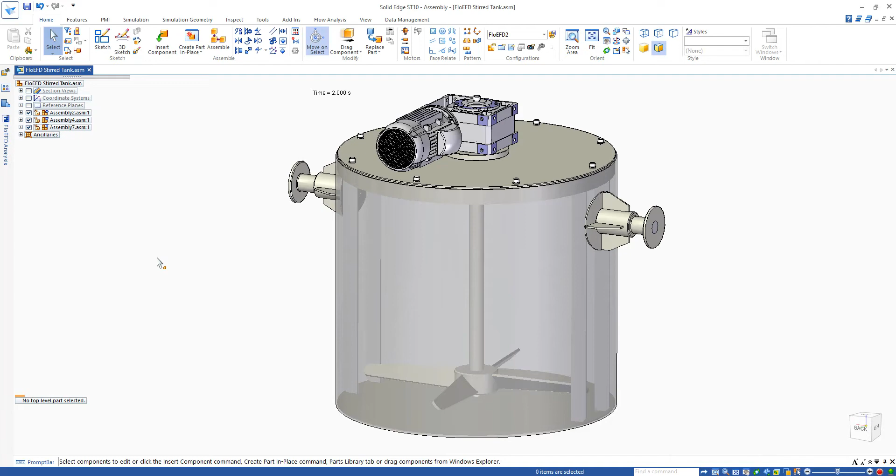So first of all, let's go over to our flow analysis tab and have a look at some of the general settings. We can see straight away this is going to be a time dependent or transient analysis, so we're going to be simulating over 2 seconds of transient. We've got gravitational effects turned on. We also have rotation with the sliding mesh turned on, so we're going to be using the moving mesh capability of FLOEFD. If we look at the fluids, we can see that we're mixing water and ammonia together.

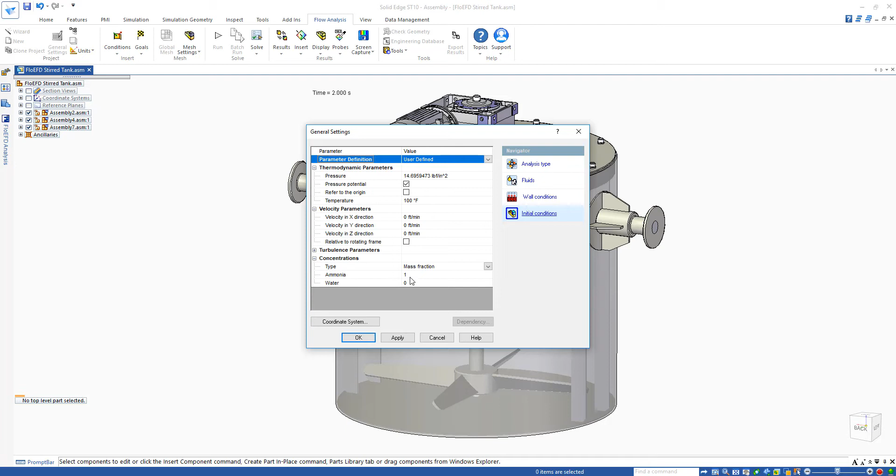And under the initial conditions, we can see that at time 0 it's going to be 100% ammonia in the tank as the starting fluid. Now if we come over to our FLOEFD analysis tree, we can have a look at some of the setup here. So first of all, you can see that we have a rotating region on the paddles. We're moving at 240 RPM.

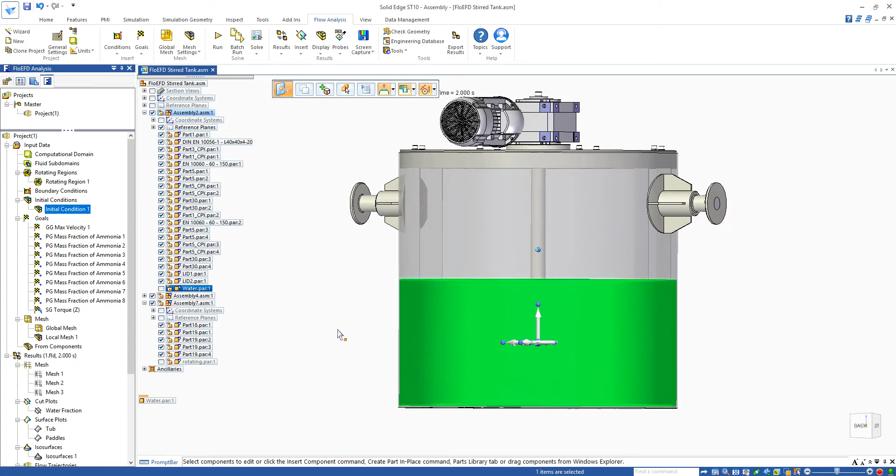The initial condition, you can see that there is a fluid level here, so the lower half of the tank is filled with water. If we look inside the properties here, we can see that we have water, 100% water at 100 degrees Fahrenheit, and we'd like to see what the mixture looks like at the end of that transient. So we can have a look at some of the results.

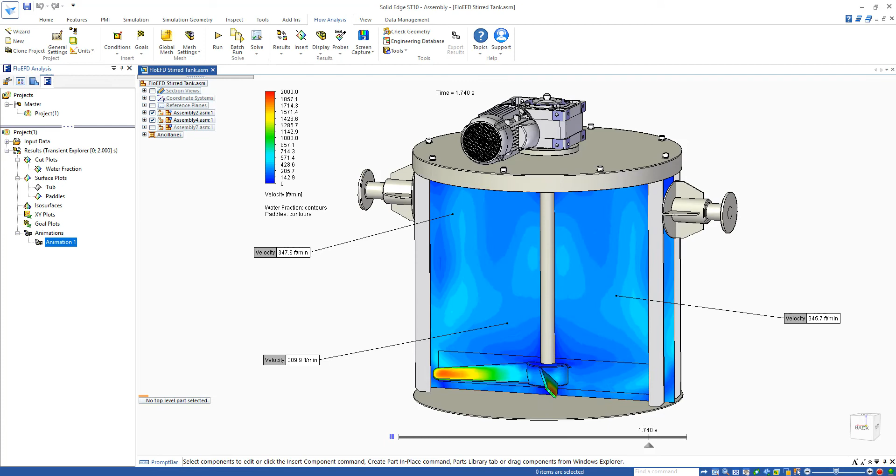This is the same plot, but this time colored by fluid velocity. We can see the high velocity region on the moving paddles. We can also see the flow develop as it moves up the inner sides of the tank and then back down the center. The maximum velocity of around 2,000 feet per minute can be seen around the paddles.

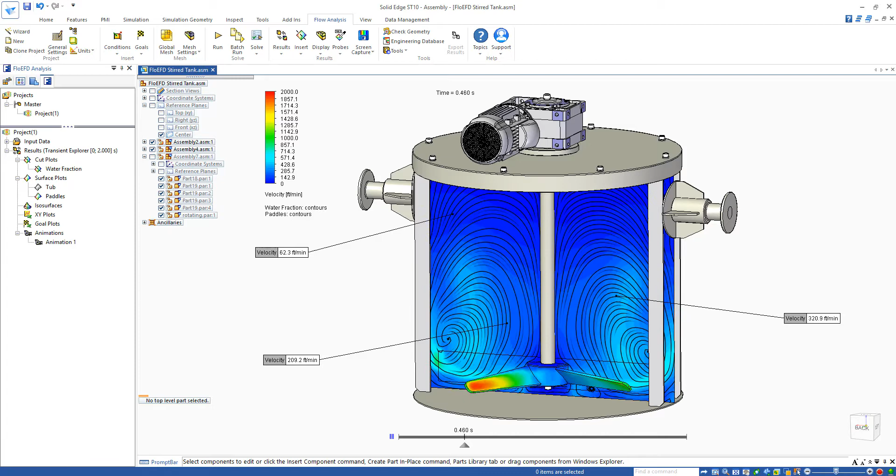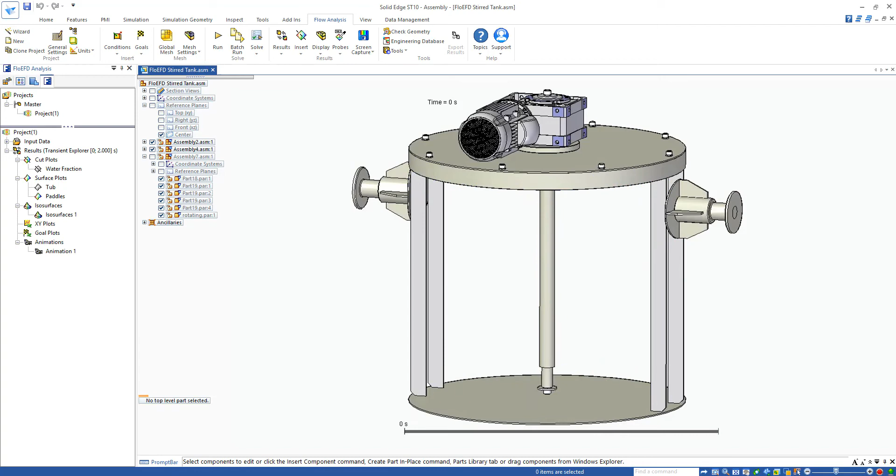Now let's have a look at an isosurface showing where the boundary of the water lies. This moving surface gives an indication of the mixing plane in the tank. At the start, it clearly divides the two fluids, but as the transient progresses, we can see the chaotic mixing until there is no mixing plane as the two fluids have been homogeneously mixed. Creating animations like this in FLOEFD is very simple using the new Transient Explorer feature.

By animating the flow trajectories, we can see how the virtual particles will move in the flow. We can see how the flow moves up the outside of the tank with a radial velocity due to the moving paddles. This has been a demonstration of FLOEFD for Solid Edge.